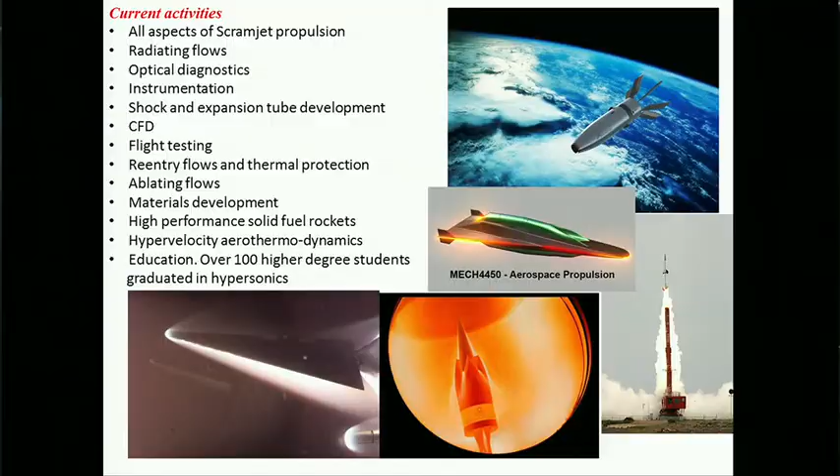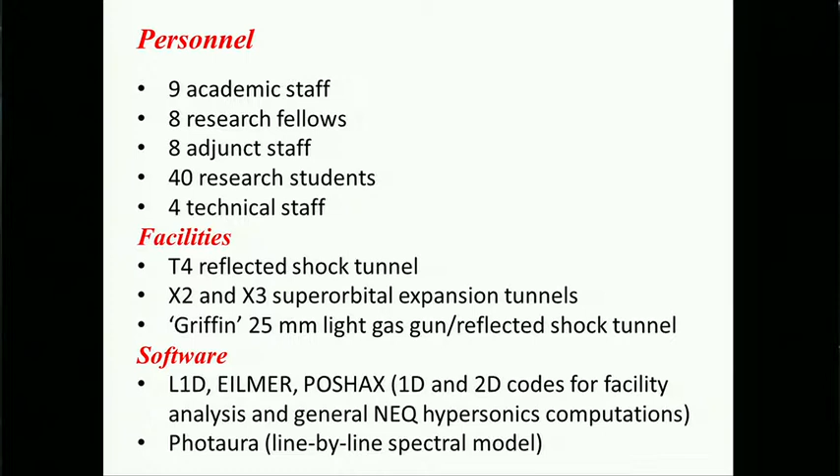We have nine academic staff members and a large number of students in hypersonics. The facilities include the T4 reflected shock tunnel, developed by Professor Ray Stalker, and expansion tubes for looking at superorbital flows, which is my own personal line of work. We also have a light gas gun, and we have developed, in parallel with these facilities, a fairly large suite of software packages.

Within flight testing, we started off flying HyShot, which was developed by Professor Alan Paull, my colleague at the time, who's now moved on to work for the Defense Services. That was basically a very small space hop to test, at about Mach 7 or 8, a simple scramjet combustor. No thrust was generated. It was a constant area combustor with all the intake designed to spill any boundary layers, so there'd be no starting problems, just to validate that we can get supersonic combustion in a duct, and also to prove that the experiments we do in shock tubes and expansion tubes actually do work.

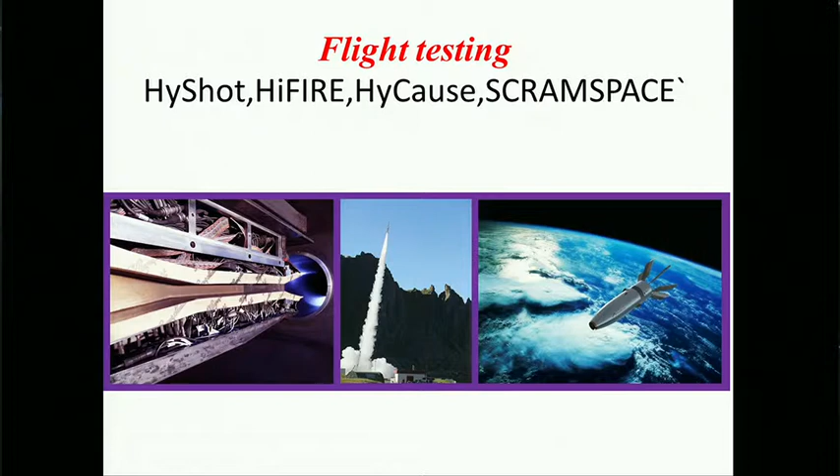That got expanded to the HiFIRE program, which we do in collaboration with DARPA, the Boeing Company, and several universities around Australia. HyCause was an American scramjet project we flew, and ScramSpace was a short-term project funded by a special grant from the government, which had a demonstration flight from Norway last year, which unfortunately crashed but had some very successful laboratory outcomes.

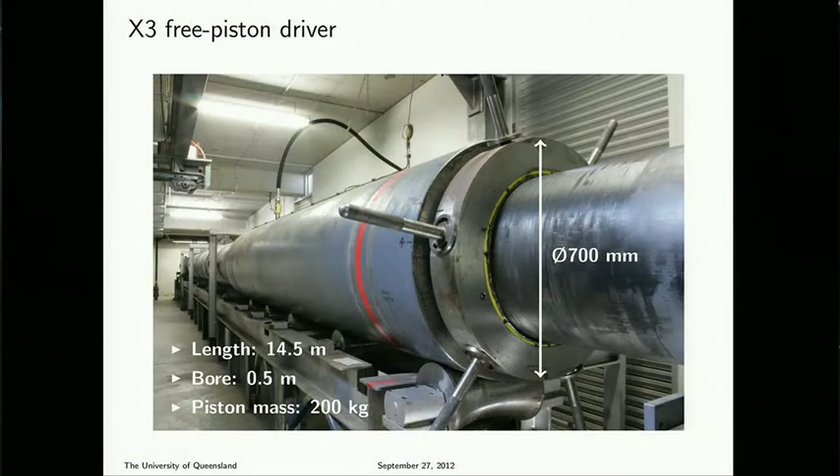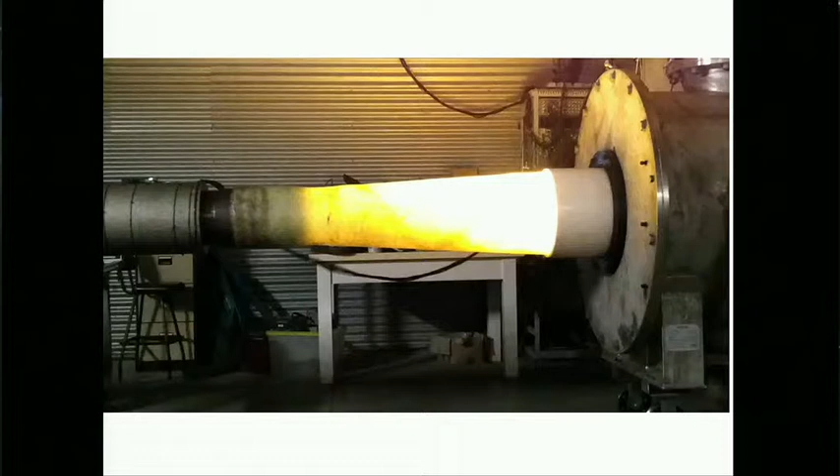I'll start with a bit about the facilities. This is the X3, our biggest tunnel, the superorbital expansion tube. It's something like 65 meters long in total, and it can reach speeds up to 10 to 15 kilometers per second. This is the nozzle - we've built a family of nozzles to go with it. We've made them out of fiberglass because it's cheap and you can build them quickly. We didn't realize when we first did it, but if the gas going through the nozzle is much hotter than the sun, the light's going to escape. So they glow when you fire them, which caused a lot of trauma for the students standing nearby on our first shot, but they're quite a reliable system.

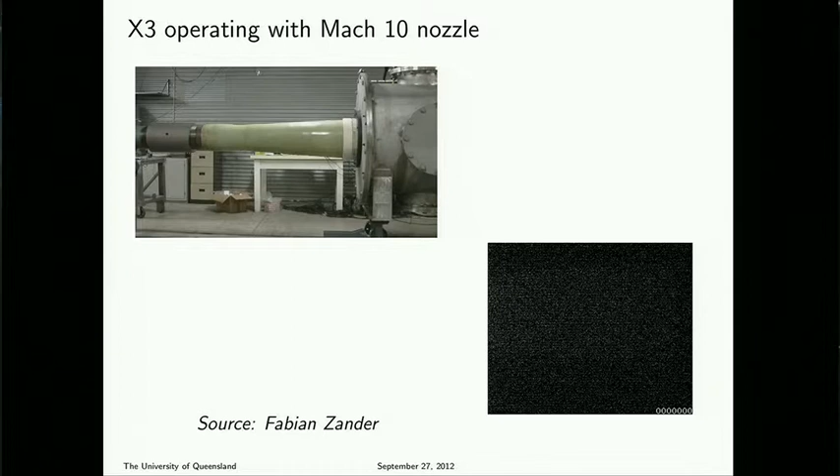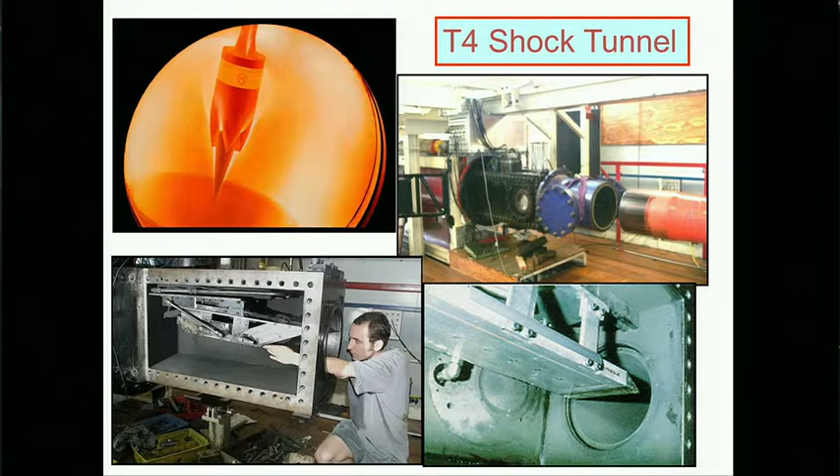So typical shock tube work, a lot of work for a millisecond of test flow, and then you have to start again. The other major facility we have is T4. This has done more scramjet tests than any other facility in the world. We've done about 12,000 runs since it was first commissioned in 1987. We've accumulated something like 10 seconds of flying time in it, and all our scramjet modules that we've flown have been tested in here.

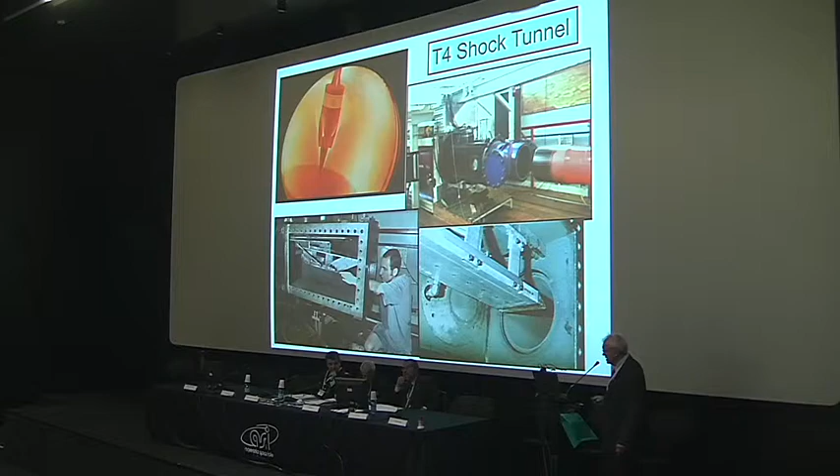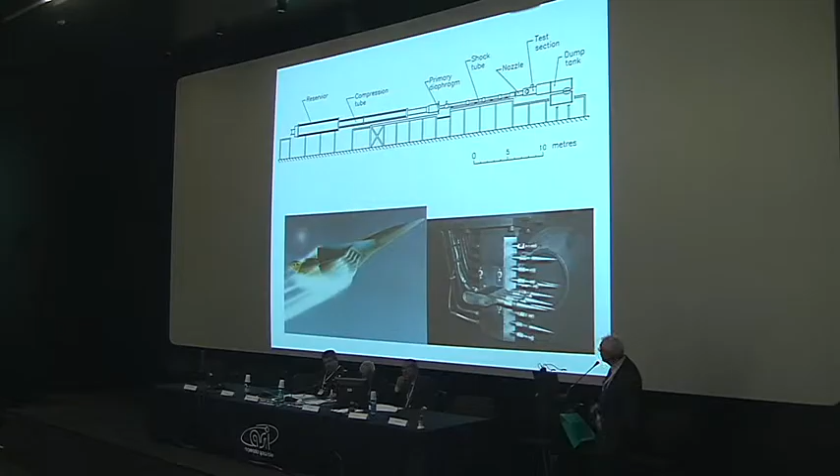We work on the free piston driven concept for our drivers. I'll say a little bit about that because it's fundamental to everything we do. This facility is about 44 meters long, and that's a picture from a test section. That's a vehicle shape we tested some years ago.

The feature of shock tubes, if you're not shock tube people yourselves, is the test time is very small, and what you've got to do is make sure you don't make it even smaller by having interference from the driver gas. So the conventional shock tube has a primary diaphragm, shock tube, secondary diaphragm, test section down there, and you burst it. The driver has high pressure, high temperature gas if you want to go to high speeds, and you burst the diaphragm, the shock wave rattles down the tube, an XT display shows a reflected shock at the end. That's your test gas, of which you have very little.

But what you have to be careful of is when the expansion wave, the unloading wave, when you burst the diaphragm, reaches the end and comes back down, it catches up with the flow, and that can destroy your flow before it's even begun. So to avoid this problem, you have to make these driver tubes quite long, typically 25 or 30% of the total length of the tube, because they're rated for, say, 1,000 atmospheres pressure typically, and they may take temperatures up to 4,000 degrees. Very expensive bits of hardware.

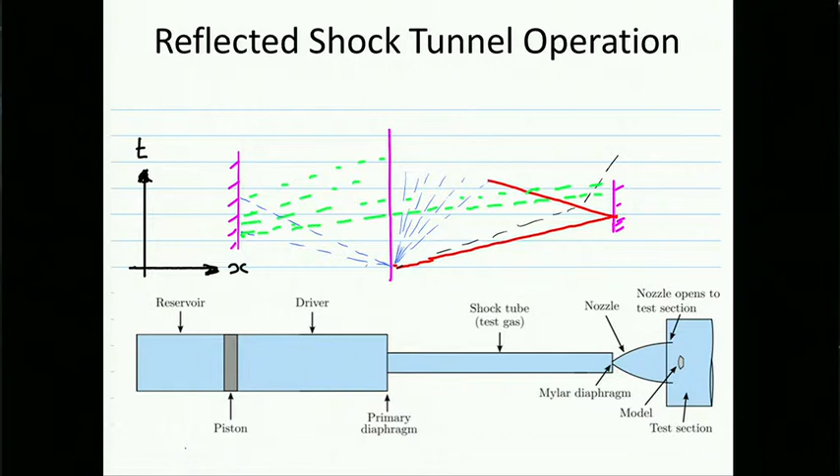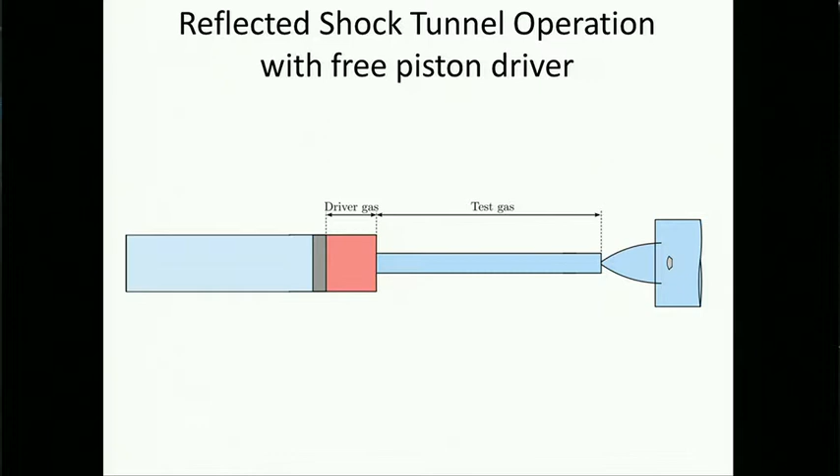So the way we get around that problem is to use what's called a free piston driver. Our driver gas is contained in a tube by a piston, and we move the piston like a bicycle pump to generate the compressed gas. When you reach a certain amount of compression, the diaphragm bursts, and the gas is very hot. You may wonder, well, how does it work if it's such a short tube now? The expansion waves will come running back downstream to kill the flow. Well, if you get the piston speed right, the movement of the piston cancels out the expansion waves from the diaphragm rupturing process, and for a short period of time, you can hold constant pressure.

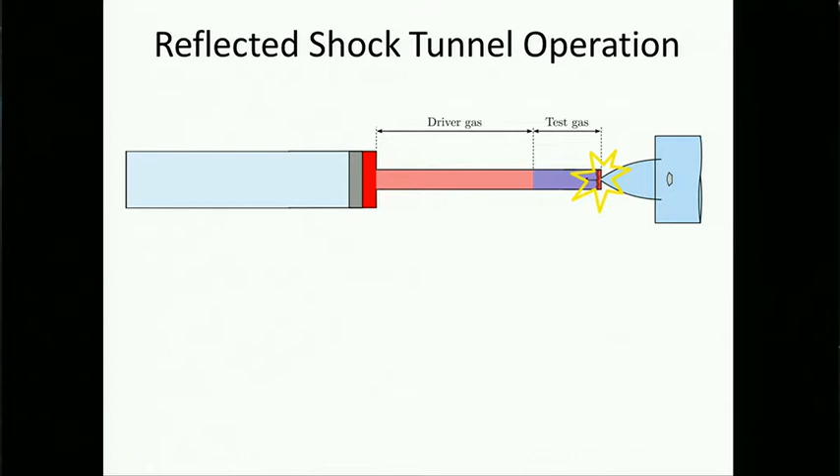So you have a much shorter driver tube with very good flow quality. From that point in time, the shock wave travels down the tube and does its stuff at the end. This is your test gas going through, and eventually you run out of gas. But if you get all these dynamics right, you can get a reasonable amount of test time, several milliseconds.

One thing we've looked at is radiating flows. A problem of studying radiating flows in the laboratory, of course, is they don't scale properly. So if you look at, say, the flow field around a spacecraft, it's radiating here. If you zoom in on this part of the flow, and if we do a scale model—take, say, a 5-meter flight vehicle and make it, say, 200 millimeters to put in a shock tube—it doesn't scale nicely.

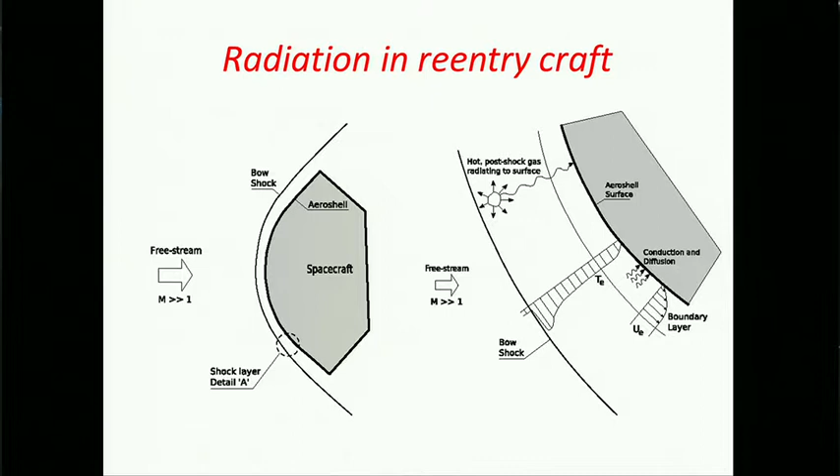So we have two different approaches. We zoom in on the flow behind the shock wave, doing them at real pressures in a non-reflected shock tube, to get those. But when we do that, we're not recreating the flow field around the body. We have parallel experiments in the expansion tubes at high density.

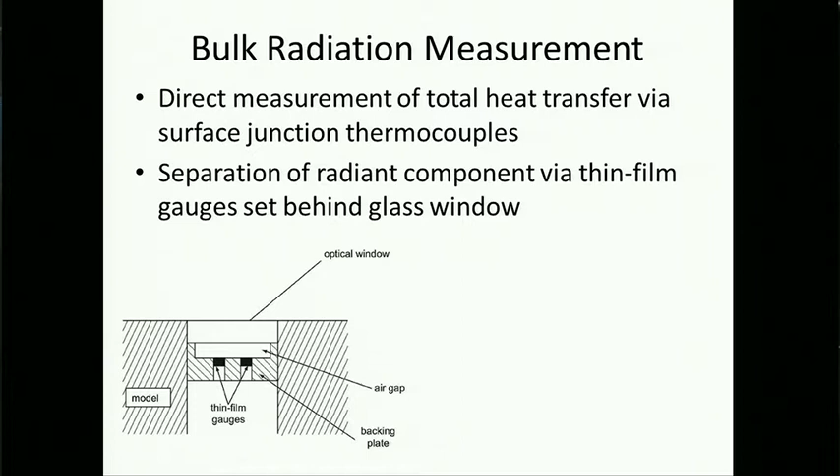Of course, when we do that, we just measure total heat transfer; we're not separating the radiative component out. So we developed in parallel with this radiation gauges, which had a glass window to let radiation through. The instrumentation behind the window was isolated from convective heating, so it was able to separate radiative and convective components.

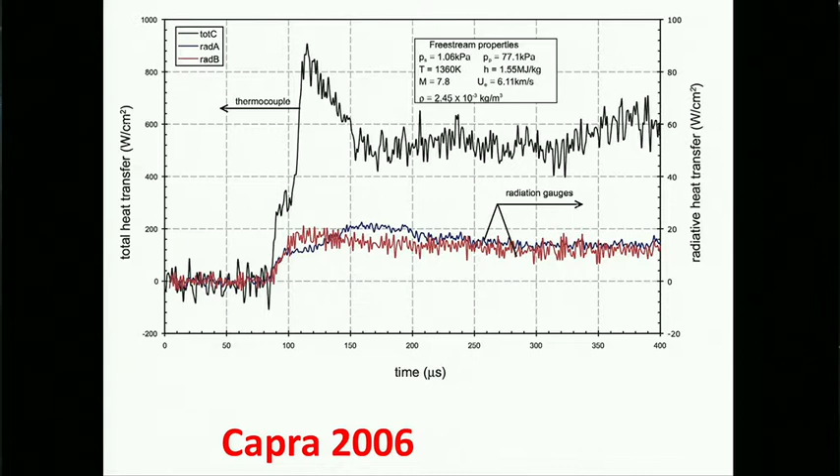This is sample data from the X3 expansion tube looking at Titan gas, the stuff that's got lots of methane and nitrogen in it. So this is our total heat transfer, and separating from it a radiative component, which is only a few percent of the total. We can get reasonably accurate measurement of radiation in these flows.

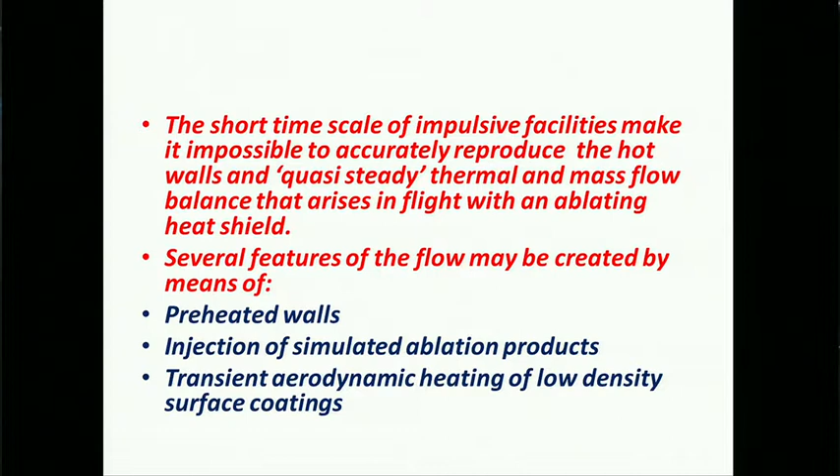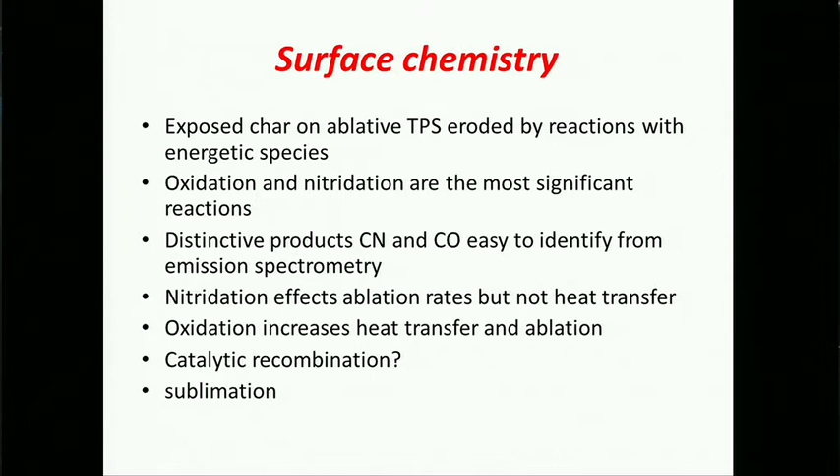Another problem with looking at re-entry vehicles in a shock tube is it's hard to get the real temperatures associated with flight, thousands of degrees. One way around that is to preheat your walls. We can preheat the walls if they're made of graphite just by putting electric charge through them. Our student here has developed a technique for preheating our walls up to about 2,500 degrees.

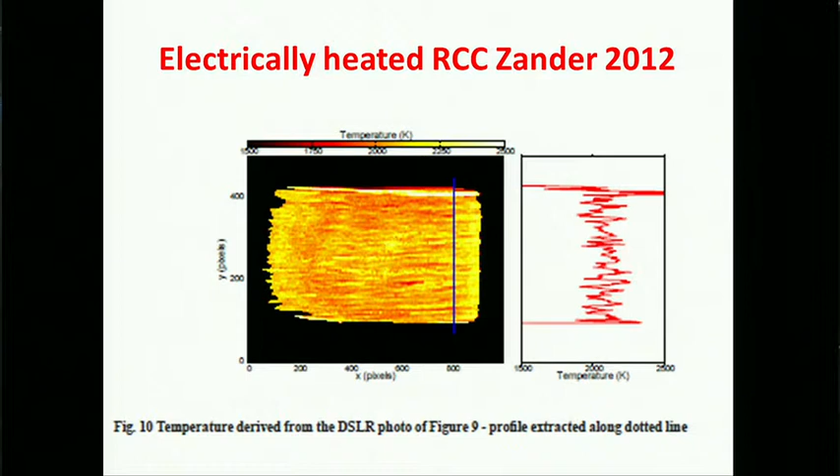This is a sample of our wall temperature for an ablative experiment, shown through infrared imaging. It's up at about 2,000 degrees. And if you look at it in the flow, you can see this was a simple horseshoe-shaped vehicle. We can look at the spectrometry of the flow in the shock layer to see how it's radiating.

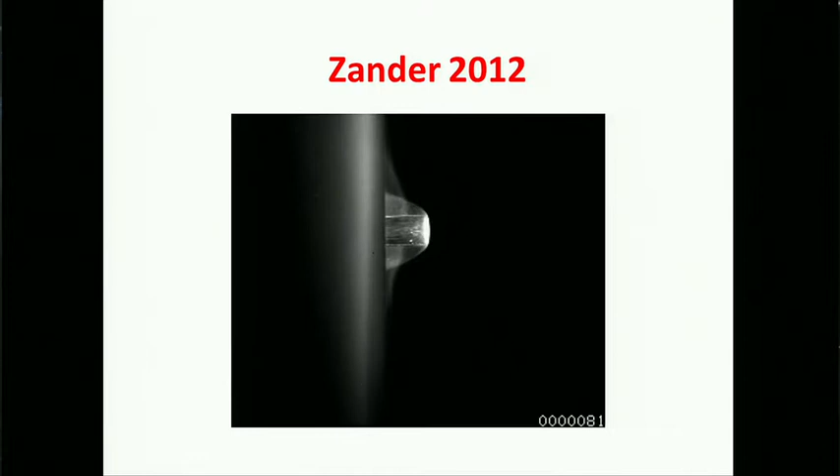We can also look at the spallation. If you watch a video of this, even though it's only a millisecond of flow, you can see spallation convecting from the shock layer down the surface. These are little fragments of carbon graphite that have come off. So we think that's a useful addition to what we can do in simulating these sort of effects.

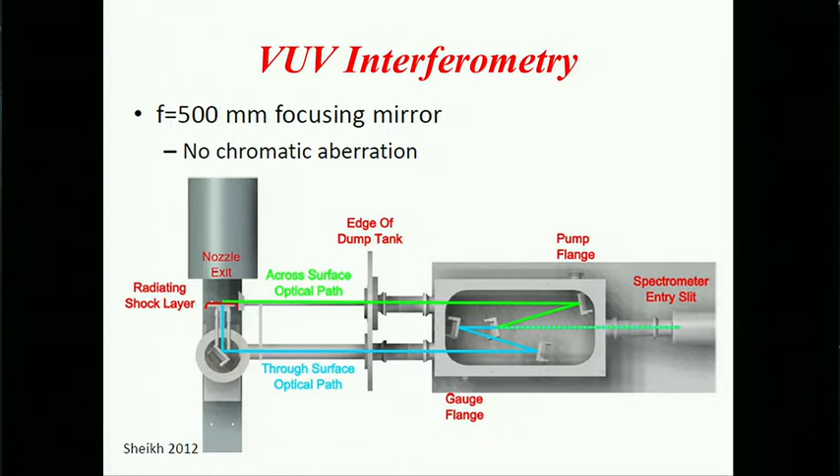An important parameter for re-entry, especially if you're looking at high-speed air, is VUV interferometry, and we've recently developed techniques to do that, whereby we have evacuated light paths enabling us to see what the vacuum ultraviolet radiation is doing in the shock layer. It's very hard to measure otherwise because it gets absorbed by any molecular oxygen in the light path.

I'll talk a little bit about our scramjet research program. This is run by Professor Michael Smart, my colleague, and he's a pioneer of the so-called REST intake of scramjets, where you go from a rectangular to an elliptical cross-section for good efficiency of structures and for getting a fairly versatile intake that doesn't have starting problems.

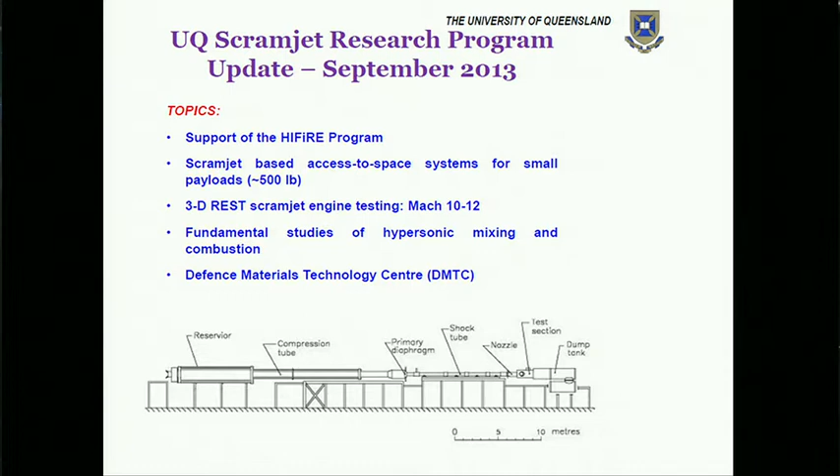This is incorporated with the HIFiRE program of flight tests, which is a series of 9 flights we're doing. I won't go through them all, but the first one was a cone transition experiment done in collaboration with Roger Kimmel at AFRL in America.

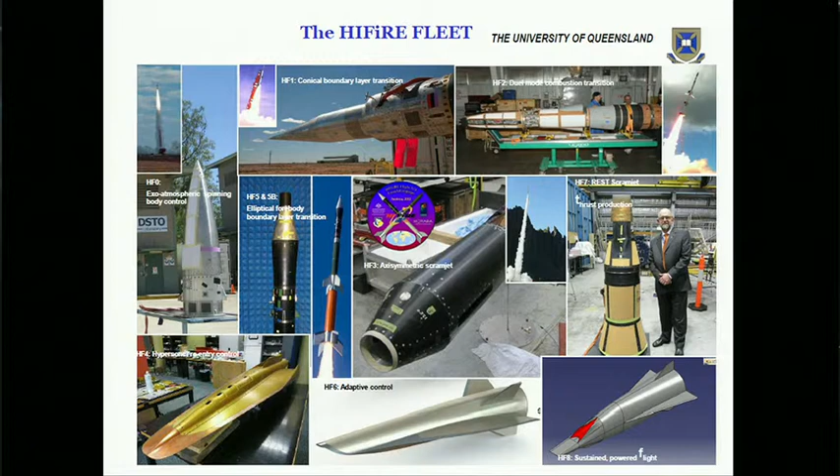These are some of the shock tube experiments that go with the flight program. We've got a REST intake set up here and we're pumping in the fuel, measuring its performance before we fly.

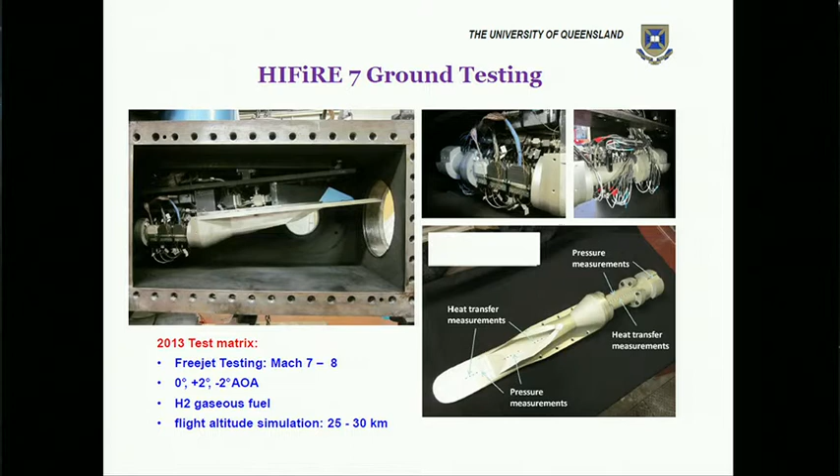Again, we have the same problem earlier speakers mentioned about getting transition in our scramjet intake to prevent boundary layer separation. We have artificial means of simulating transition or inducing turbulence. We're also looking at how you package these into something that can fly and be a useful product.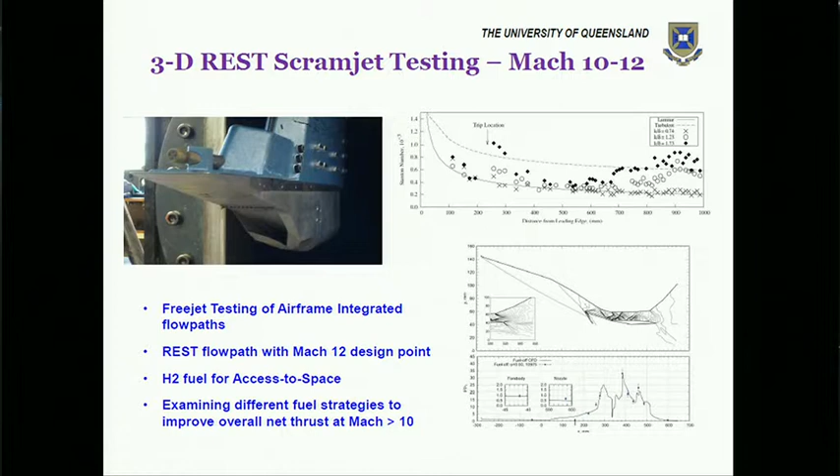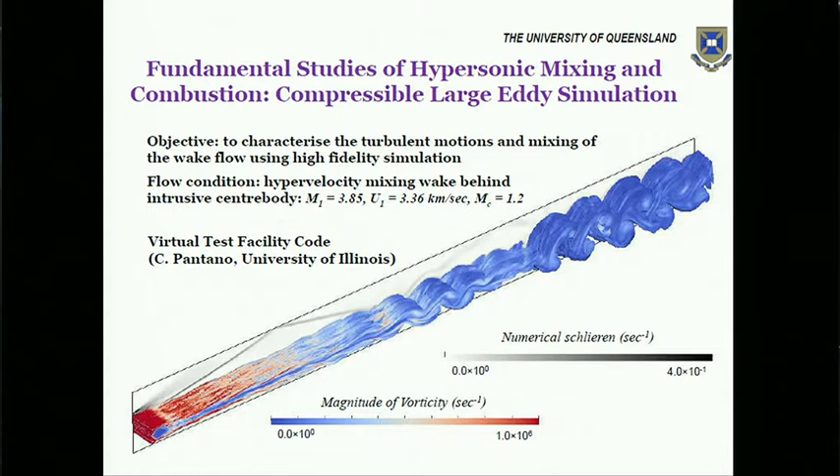Part of the associated research is mixing processes involved in a scramjet. You have very little time from injection to the gas going out the exhaust to generate combustion and thrust. Associated with that, since we're now flying, we have to worry about the engineering issues of not burning up, protecting things. So we've developed at DSTO in Melbourne a vitiated air facility to give extended duration tests of the thermal protection systems required for flight.

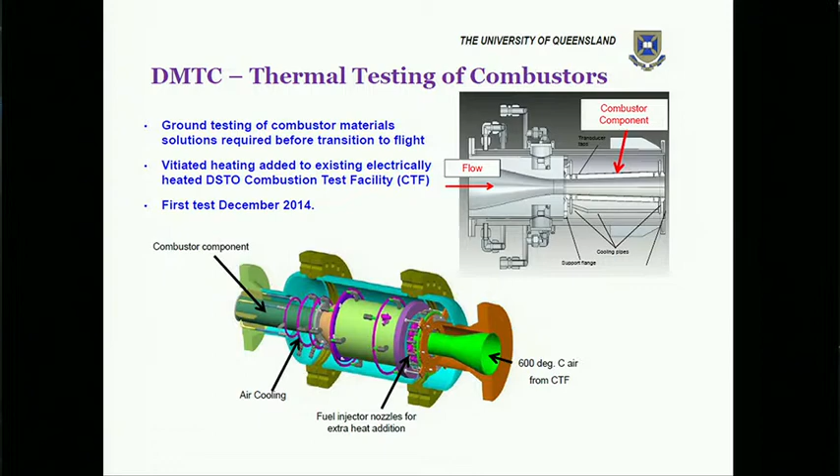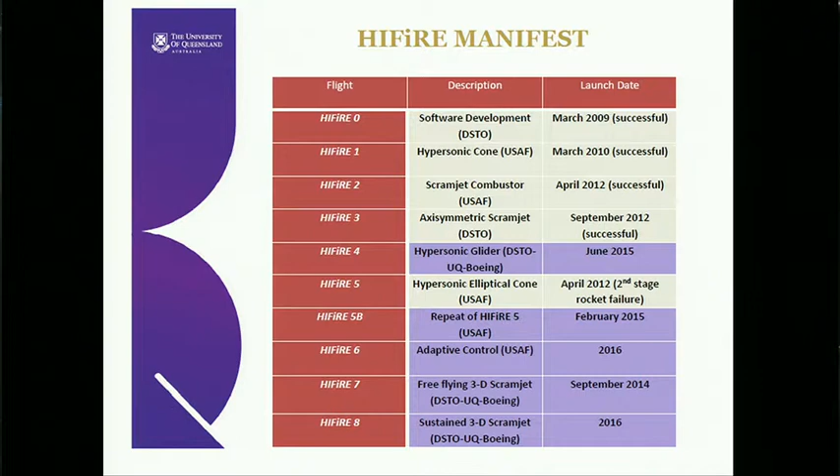I'll finish by talking about another group in Australia, at the University of New South Wales in Canberra. They're a group of academics and researchers who have a shock tube, and they also specialize in instrumentation, particularly instrumentation for flight programs. They've provided a lot of packages to fly on the HIFiRE, HyShot, and SCRAMSPACE programs, and they also do work on engineering evaluation of the thermal protection systems that fly.

One of the items they flew on the scramjet was a diode-based laser sensor, which is inclined at an angle to the flow. You can generate a Doppler shift, get a velocity measurement, and it can also give you temperature and pressure measurements in flight, which are very useful. Unfortunately, we flew it on the Scramspace vehicle, which crashed. The Doppler shift part of it relies on a significantly high velocity.

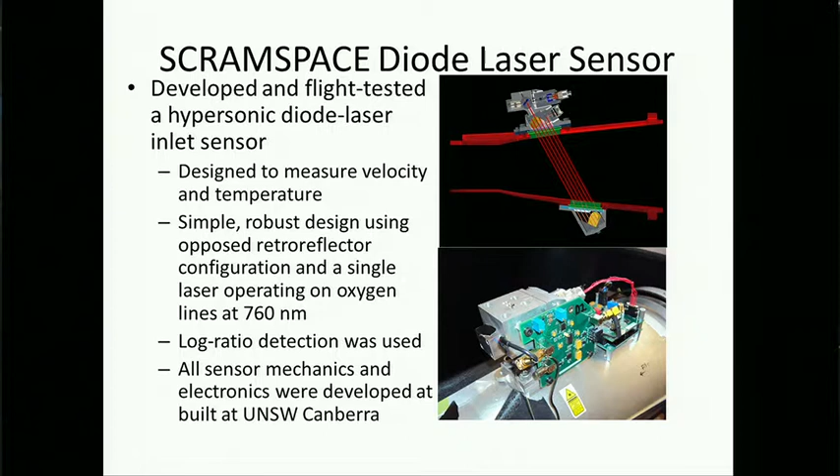The optical path bounces up and down, so you've got components of the light path going in both directions, and you get a double shift of the peak in the optics due to the Doppler effect. So for it to work, you have to separate the two peaks. Unfortunately our scramjet's first stage failed on launch, so we didn't actually get fast enough for the Doppler shift to work, but the pressure and temperature measurements functioned perfectly despite being subjected to significant shock in the accident. We never actually developed the shifts in these traces that would have enabled speed measurement to develop.

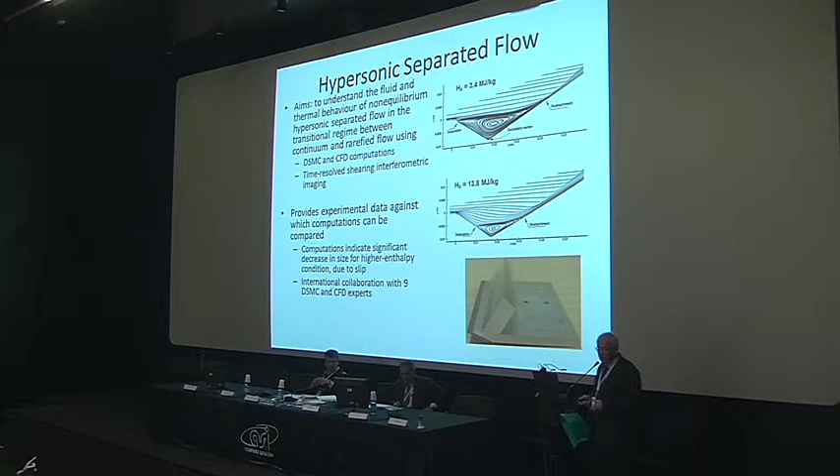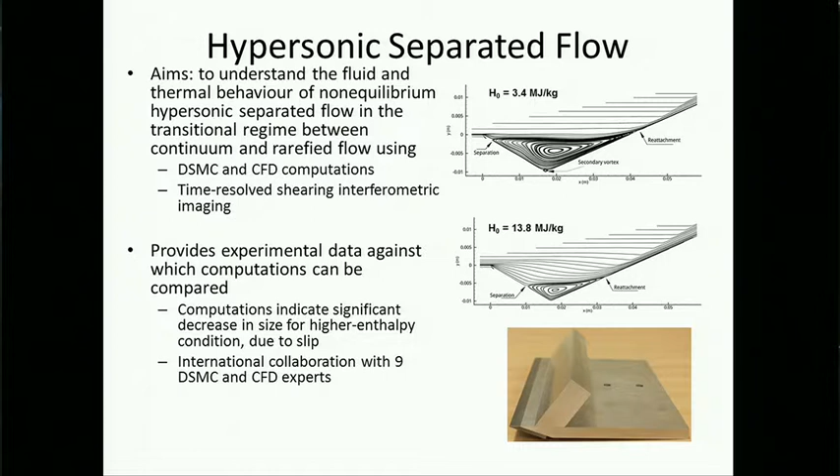Other things they're investigating is the interface between continuum and rarefied flows in their shock tubes. The problem with them experimentally is the density is so low you can't see anything, so they've developed high sensitivity flow visualization systems to help them picture the flow field in a rarefied and transitional flow.

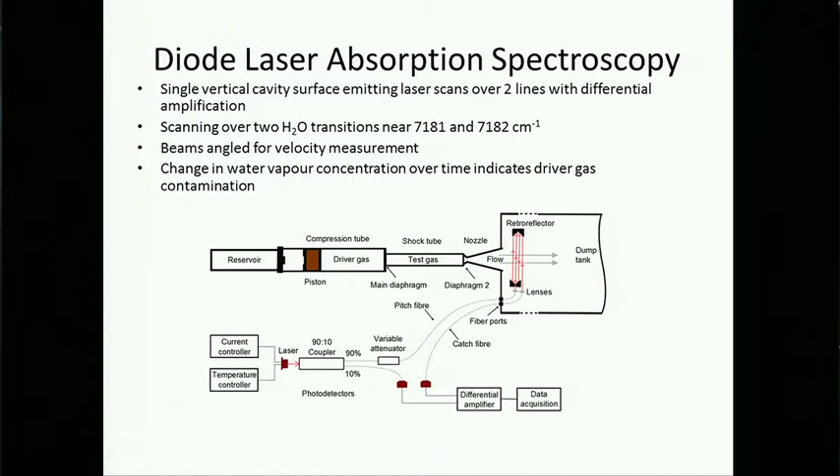These are data from their tunnel, this is validation tests in their shock tube of the flight hardware. So this is the multiple path laser system, which can give you pressure and temperature, and then if you incline it to the flow, as we did in flight, it also becomes a Doppler shift measurement.

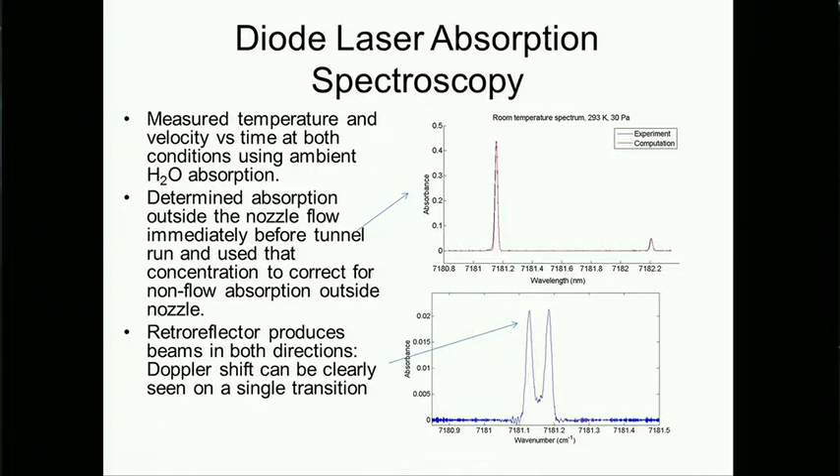So this is a function in normal circumstances, you get a separation of what's going on here, the two peaks, but we never got to that speed. We only got single peaks, so we didn't get a velocity measurement out of it. But the technique is validated if anyone would want to fly this sort of thing in the future.

This is calibration of ours, okay, that was a timely move. In association with some of our experiments, we've put thermal sensitive paint on the outside of some of the rocket that could be recovered after the flight and interrogated to see what maximum heating certain parts of the vehicle were subjected to.

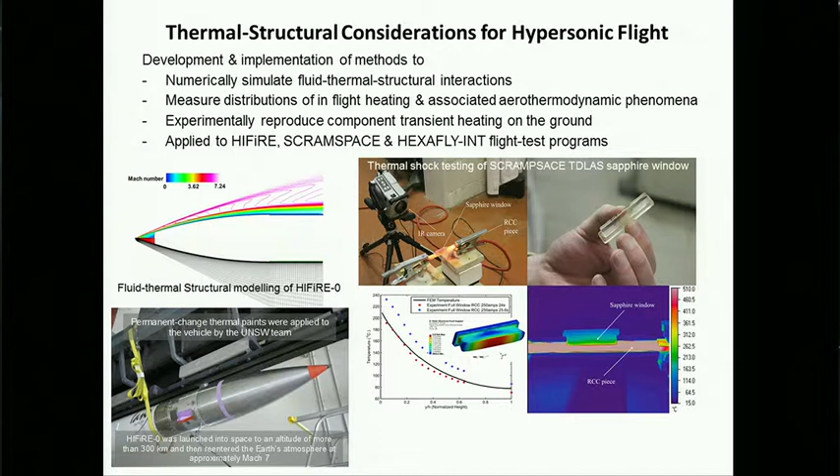They've also done thermal stressing tests where they heated up part of certain optical components, looked through windows. They heated up a bit of carbon to 2,000 or 3,000 degrees, put it in close proximity to the windows to see if it would survive the thermal environment of flight. It turned out to be a very useful test, very simple but very useful, to check out your materials before you incorporate them.

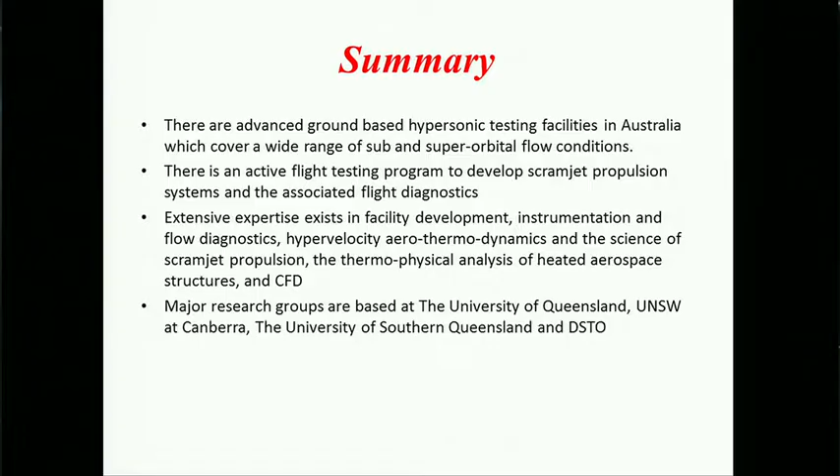To summarize, we've got some very good experimental facilities in the country. We've got a flight program which is trying to take the ideas of the laboratory into the flight regime. And there's a broad amount of expertise in the country now for all the aspects that you want of hypersonic flight and of the science of the various aspects of aerothermodynamics, scramjet propulsion, re-entry, etc.

And we have 3 major groups in the country: University of Queensland, where I work, University of New South Wales, based in Canberra, and University of Southern Queensland, who work very closely with, and of course there's a 4th one, the DSTO, the defence-related research program on hypersonics. So I'll stop there, thank you.